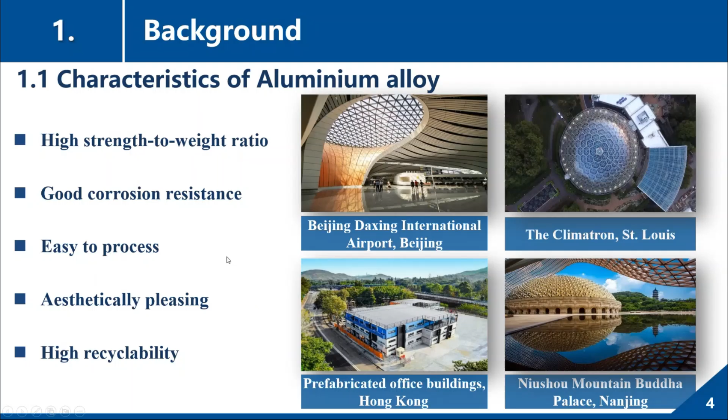But although there are several merits, some characteristics of aluminum alloy we should pay attention to in real engineering practice. For example, the elastic modulus of aluminum alloy is very low relative to steel, around 1/3 of steel. So the buckling performance of aluminum alloy members is not as good as steel members.

More than this, the elevated temperature performance of aluminum alloy structure is also not as good as steel structures. First, it will melt at around 600 centigrade. And it has a sharp reduction in elastic modulus and yield stress when the temperature is higher than 300 centigrade. The pictures on the right-hand side present this characteristic.

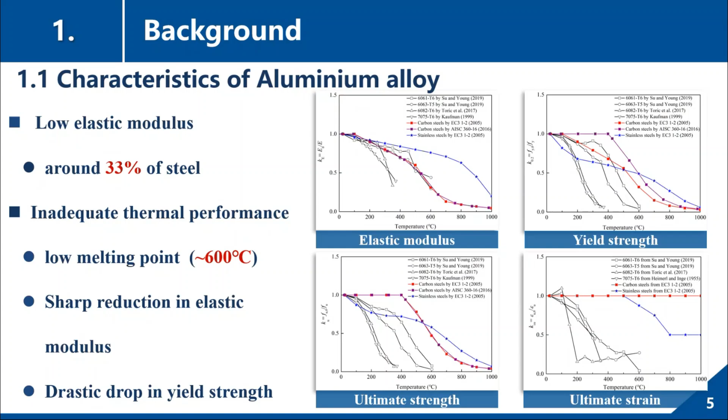So in order to accurately design the high temperature behavior of aluminum alloy, current codes such as Eurocode, American code, and Chinese code give a lot of design formulas, but there are some limitations. First, although aluminum alloy degrades at high temperature, the codified methods neglect it. The second point is that current codified methods neglect the shape variation of the constitutive curves of aluminum alloy. There is a stronger strain hardening behavior at higher temperatures, and this influences the high temperature behavior, so codified methods should consider this.

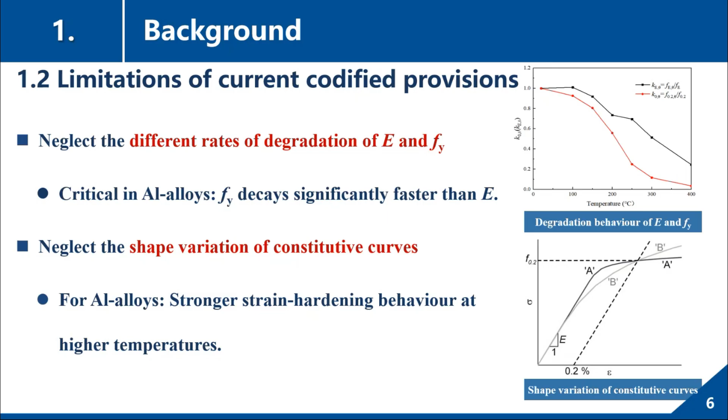So this is the background. To overcome the current limitations, we carried out a series of studies during the past 5 to 6 years. The first is at the material level.

We carried out tests for two kinds of material. The first one is the high strength aluminum alloy, it is 7,000 series. The second one is normal strength, it is 6,000 series.

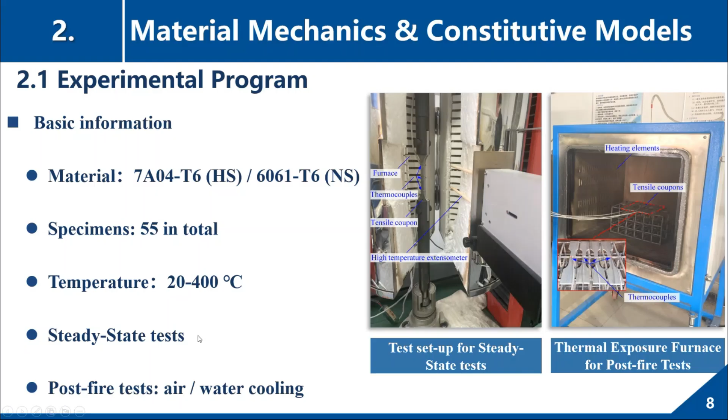In total, specimens were tested in the range from ambient temperature to 400 centigrade, and these tests were carried out in two conditions. The first is steady state. The second is post-fire state. For the post-fire cases, there are two kinds of cooling method, air and water. So we got the stress strain curves of all the specimens.

For the steady state tests under high temperatures, the stress degrades clearly when the temperature increases. But for the post-fire tests, the data scatter much more notably than the steady state tests.

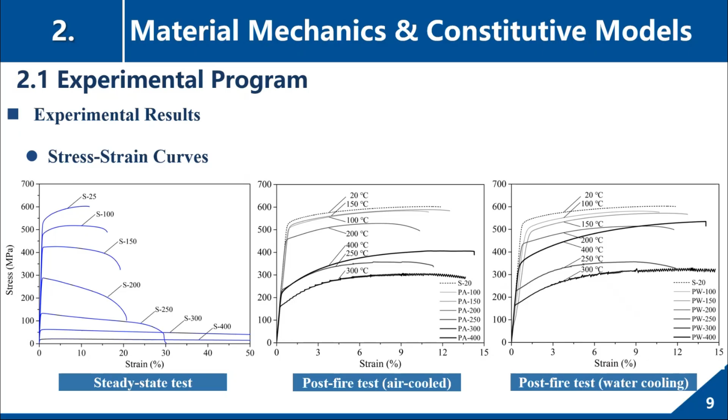And these are the failure modes. We can see that for the steady state test, when the temperature rises, the ductility, the deformation capacity, became better. But for the post-fire tests, the deformation capacity remains almost the same.

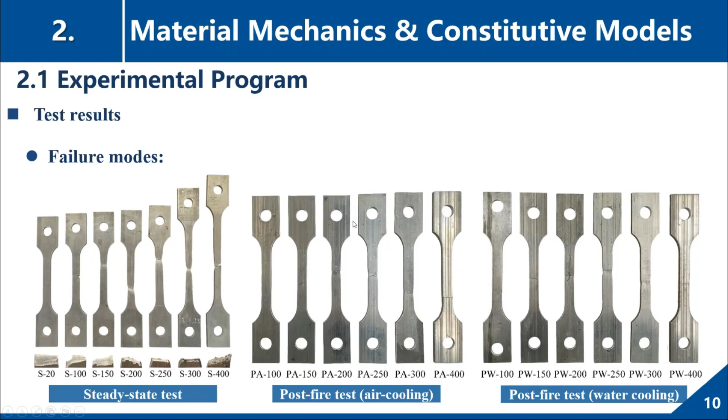Based on the material test results, as well as results collected from literature, we proposed a two-stage constitutive model. This model is for high temperature test and high temperature material property, and it is based on the ambient temperature constitutive model of the two-stage one, proposed by Xiang and me, and published in Journal of Structural Engineering in 2021.

And it is really a highly cited paper. Till now, I think the citation of it is around 150.

And for this model, we can see there is a very important point. It's called the middle point between the yield point and the peak point.

Why do we use this point to capture the second stage? Because for aluminum alloy, sometimes it will fracture before the strain equals 1%. But other constitutive models of the two stage, for example, some stainless steel constitutive models, adopt epsilon 1 for the second stage. But for aluminum alloy, we cannot use this point because it may fail before that point.

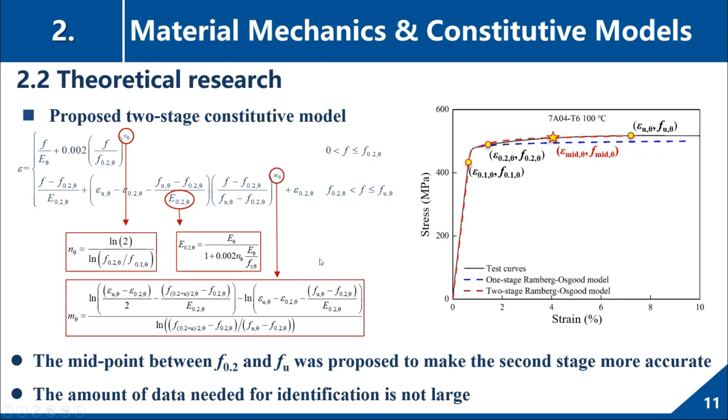So we propose the middle point between the yield and the peak point. And finally, we calibrate the model from the test results and found that the model is rather accurate. And we validate the model through the experimentally obtained data.

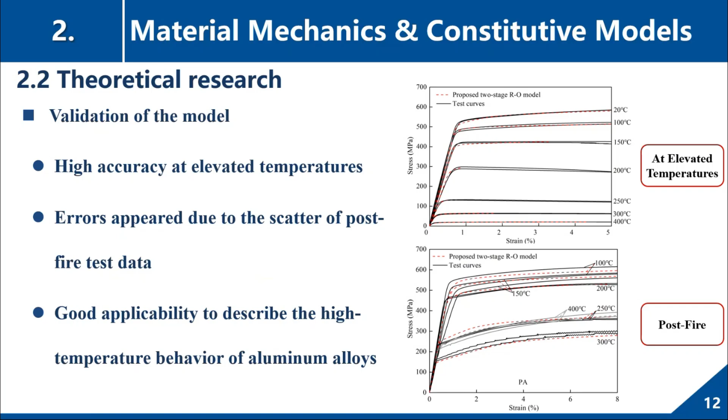So based on the material level investigations, we start to investigate at the plate level, because all the cross sections are composed of plate elements. So the plate level research should be the first step.

So we carried out numerical research based on over 1,000 models. This is the model assumption.

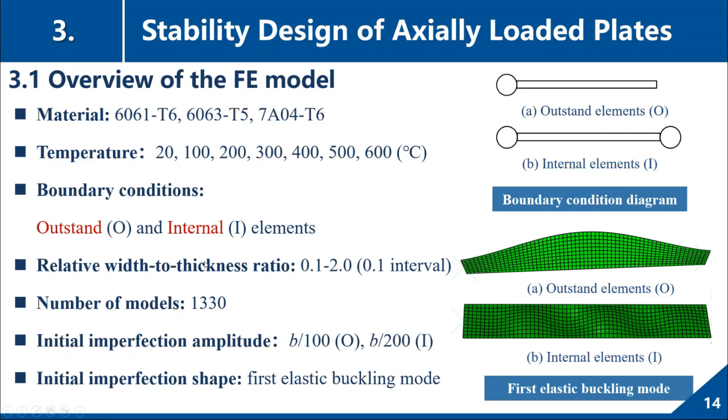First, we should validate the plate FE model. We used published results from a Netherlands researcher, and found that our FE model is very accurate.

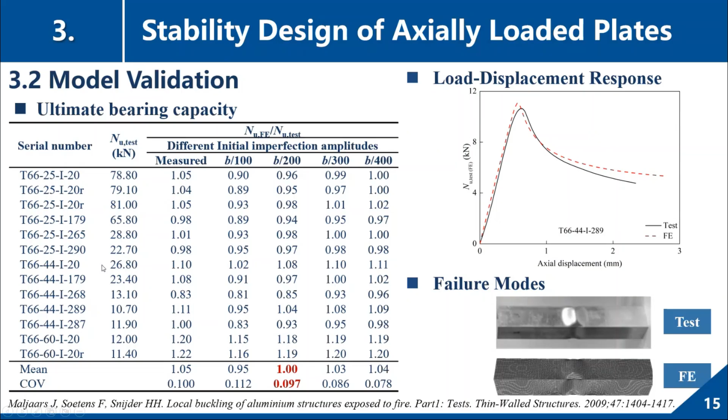And then we can use this FE model to carry out parametric analysis. The first step, we use more than 1,000 data points to evaluate the accuracy of existing models.

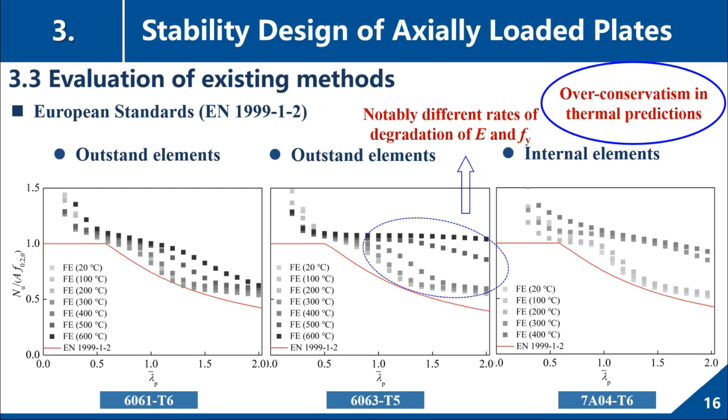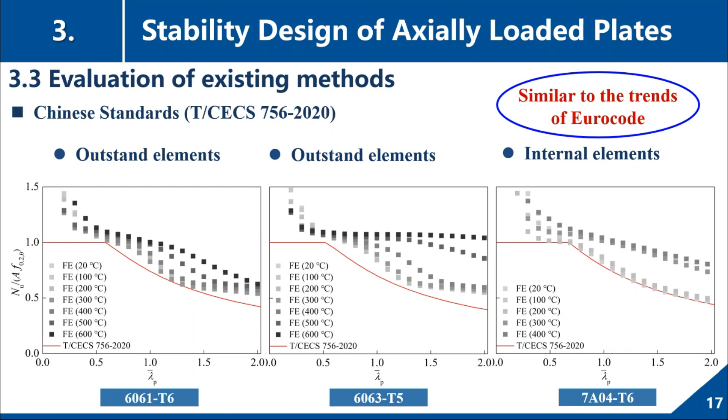The first one, the European standard. We found that because of the different degradation rates of elastic modulus and yield stress, the accuracy of the Eurocode method is not good. It's over conservative. And then we evaluate the Chinese standard, because the Chinese standard is very similar to the European one, so the outcome is also similar.

And then we assessed the American standard. We found that although the accuracy is better, it's excessively scattered.

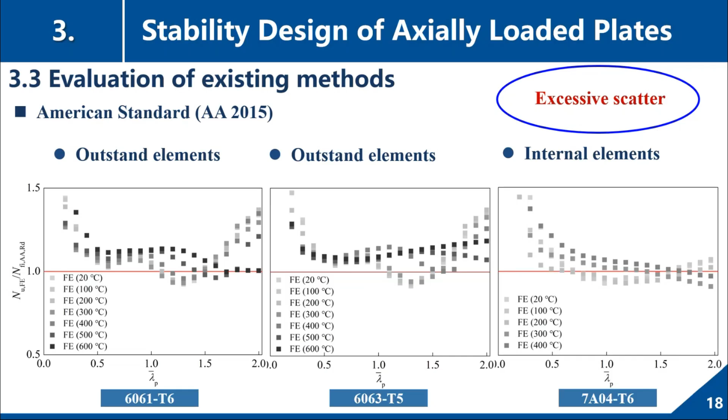After the assessment of the codified methods, we also evaluated methods proposed by other scholars. The first one is Maljaars, the co-author who carried out the tests that we used to validate our FE model. We can see that his method is much more accurate, but some data is overestimated at high temperatures.

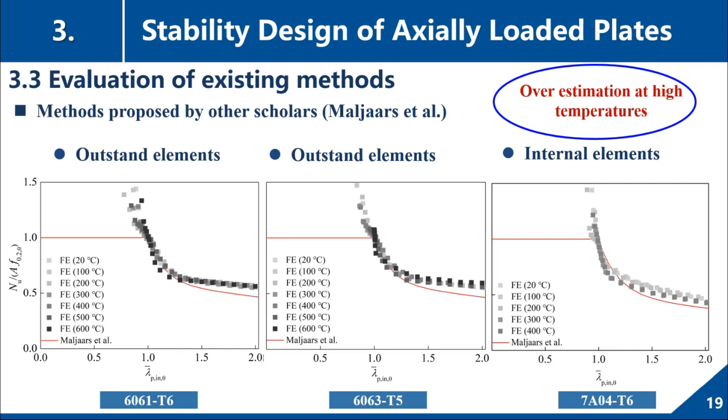To explain, we can see the data here with the dark color, meaning very high temperature. For this data, the design method is dangerous. So we found that the existing methods are not accurate and very scattered, so it's essential to propose a new model for the plate buckling resistance.

So we proposed new equations based on the European code system. For our formula, we incorporate two new parameters, lambda p theta and gamma theta. The first one accounts for different degradation rates of E and Fy, and the second one captures the stress-strain curve variation of aluminum alloys.

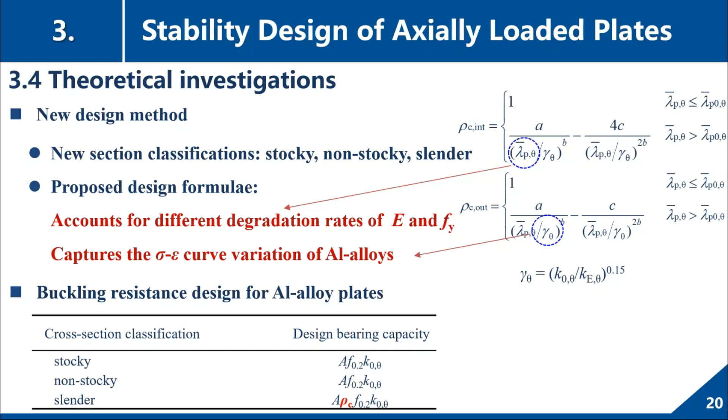Finally, we use the test data as well as the FE data to validate the proposed method. We can find that the accuracy and the consistency are both good.

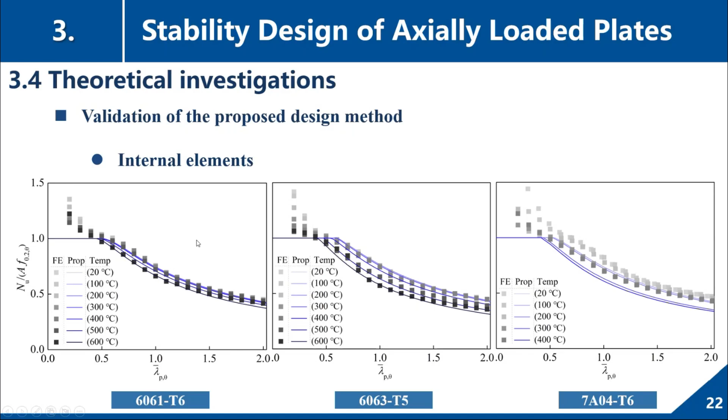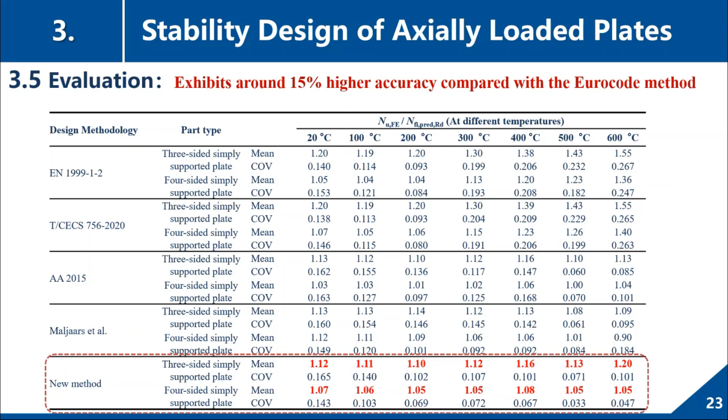And the cross-section is composed of plates, but there is a new problem, that is the element interaction. So in the fourth aspect of my report, I will introduce how we dealt with the plate element interaction.

Before the theoretical work, we also carried out a series of cross-section tests. The tests include three kinds of cross-section types: RHS, SHS, and H section. All of them are in class 4, that is slender cross-section. The material we employed was high-strength aluminum alloy, and the temperature range was from 20 to 400 centigrade. They are all steady-state tests.

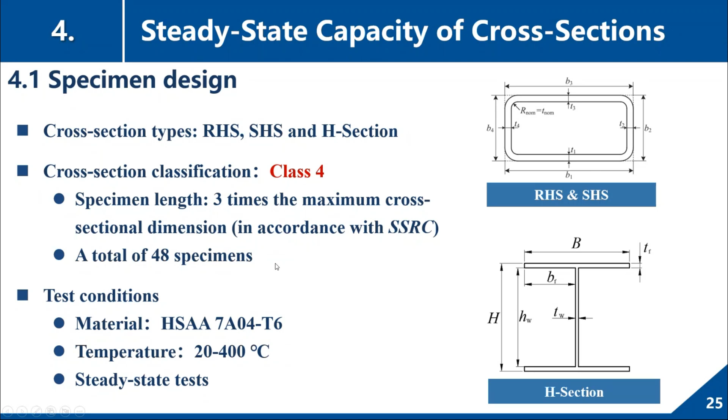Actually, we designed an electric heating high precision furnace by ourselves, and this furnace is very useful and convenient for us. The test was conducted in Tianjin University.

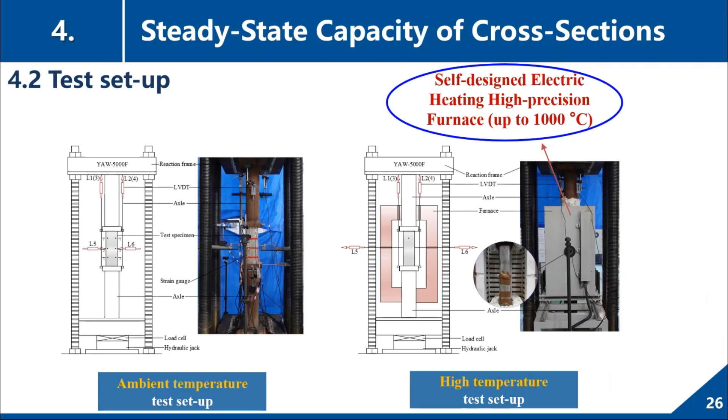Before the test, we scanned the imperfection of all of the specimens by scanner, and then we processed the data through the software of Geomagic Wrap.

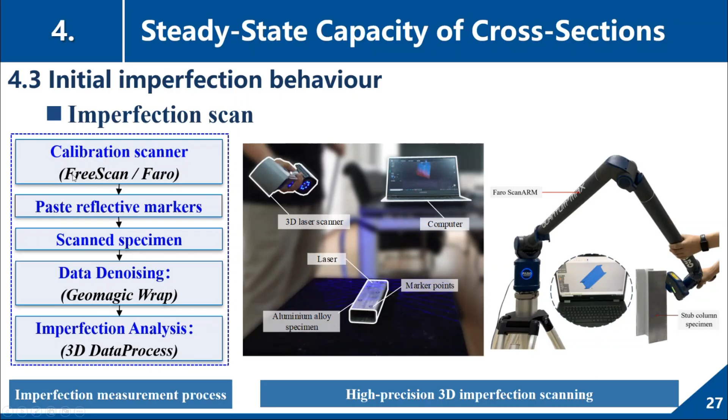We found that the high-strength aluminum alloy cross-sections exhibit smaller initial geometric imperfections compared to the normal strength cross-sections due to its strength advantage. During the transportation and fabrication, the high strength makes it less possible to deform, so it has lower imperfection.

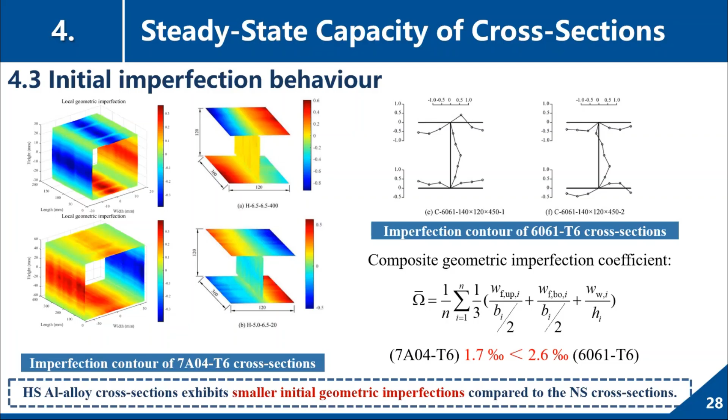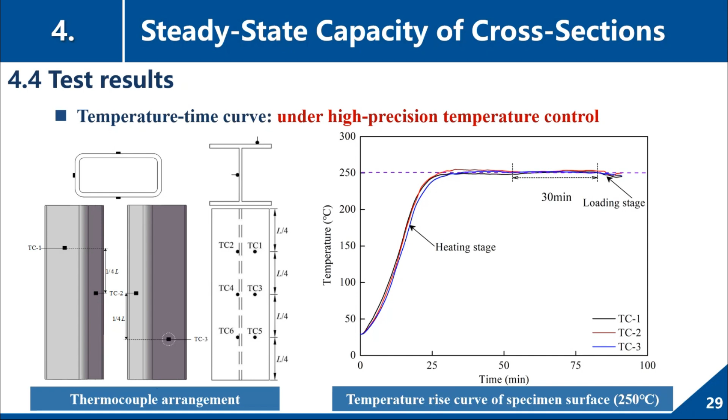And this is our temperature time curve. It presents that the test is under high precision temperature control. I think for students or professors who carried out high temperature tests, they will know it's rather difficult to get such a temperature curve.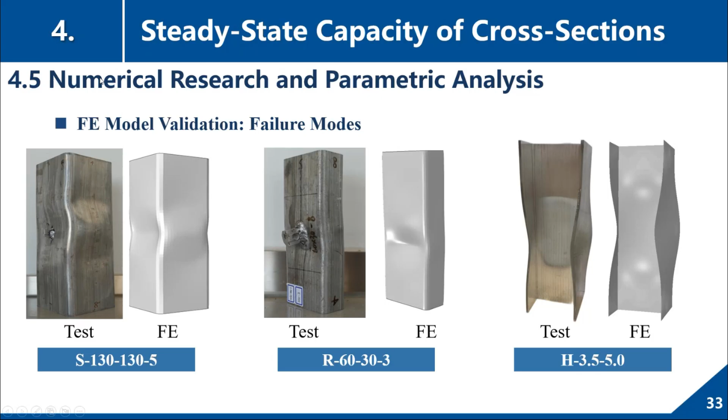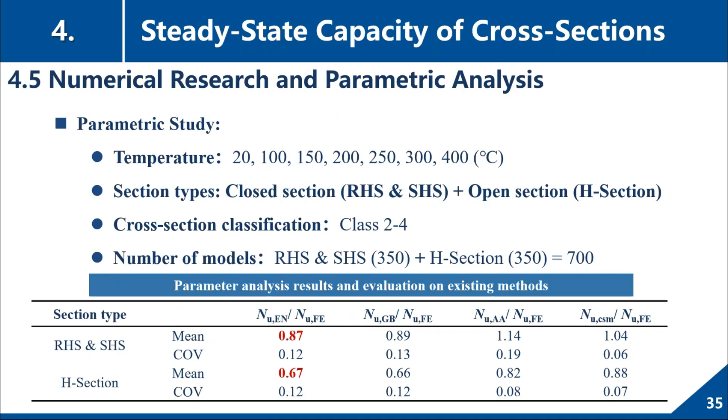So till now, all of the test data and FE data we have got. Now we will use all of the data to develop a new method to account for the interplate interaction. This is very new and very important for cross-section design, because in the design of all metal structural cross-sections, all of the codified methods till now in history did not consider the plate interaction because it's rather difficult.

Some scholars have accounted for this. I'll introduce two methods. One is proposed by Professor Gardner, an equation to account for this, but this equation is not very accurate, it has some errors. The second one is proposed by Ben Schafer, and this method is a numerical method called CUFSM. Although it is very accurate, for designers in a company, I think they cannot use this to design a cross-section.

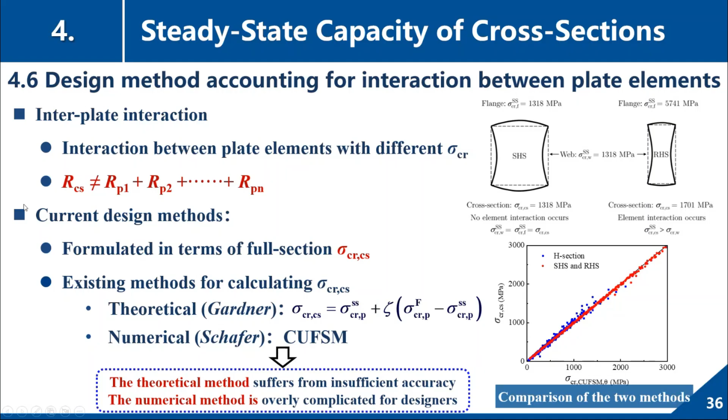So to overcome this problem, we developed a new method using machine learning. I think machine learning is also a numerical method, but it's very easy to use for designers, and it is also very accurate, much more accurate than any design formula.

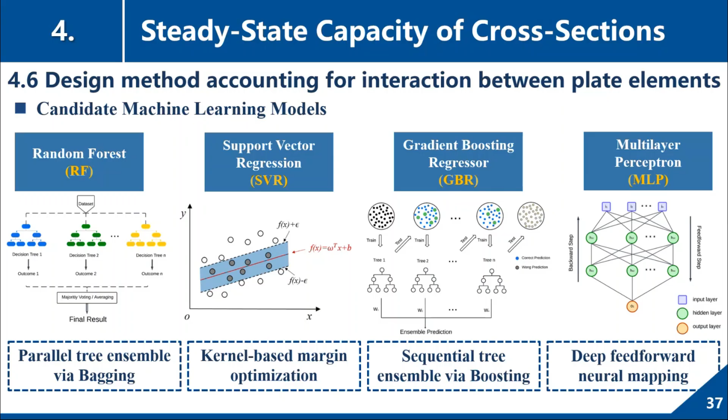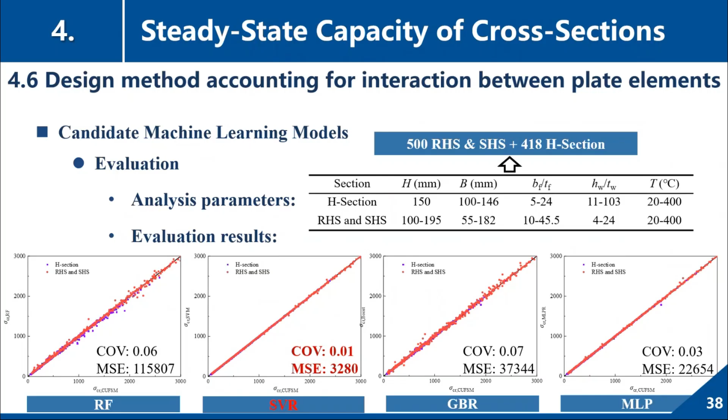To develop an accurate machine learning model, we selected a series of candidate models, and among them we found that the support vector regression, SVR model, is the best one. So in the following prediction we use this model. We adopt this model, and finally,

we propose a cross-section level method based on two parts. The first part is our proposed plate method I just introduced in the third chapter. The second part is our machine learning based predictor for the plate interaction, that is based on sigma CR theta CS, where CS means the cross-section. So we compose these two parts into our new method for cross-sections.

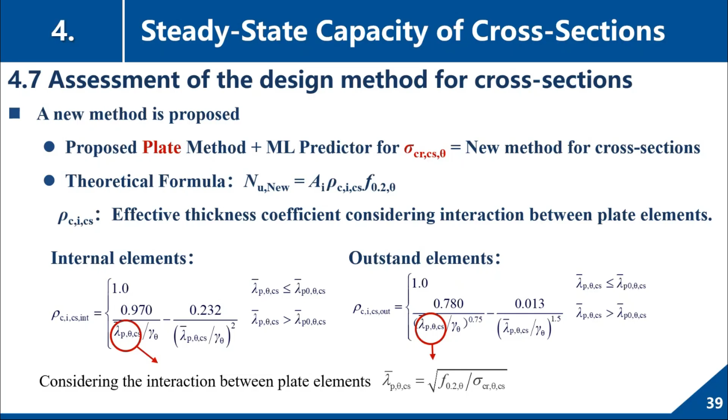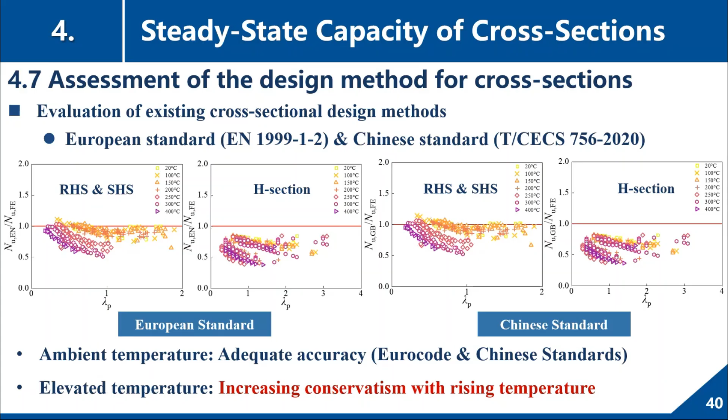So this is our new method. So what's the outcome? What's the advantage of our new method? We can see that we evaluate all of the cross-section level methods again: cross-section level of the European standard and Chinese standard. Now we can see the error is very large. We can also see the method from the American standard and also the continuous strength method proposed by Professor Gardner. For CSM, although it is accurate, the scatter is also large.

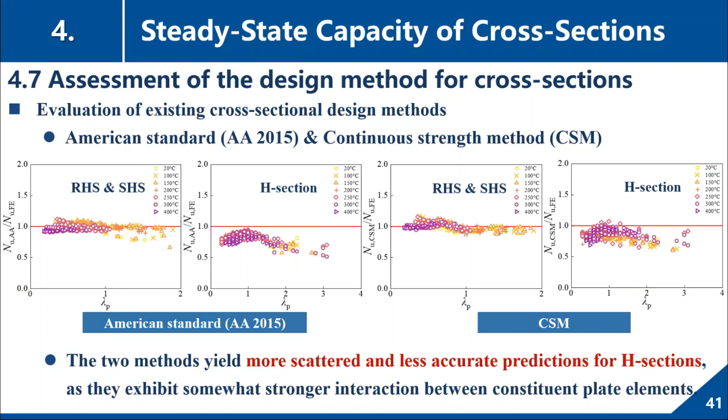Finally, these are the outcome or results of our proposed method. We can see that our method has superior accuracy, around 15% higher than Eurocode, and minimal data scatter. So this is our way to design the aluminum alloy cross-sections under elevated temperature.

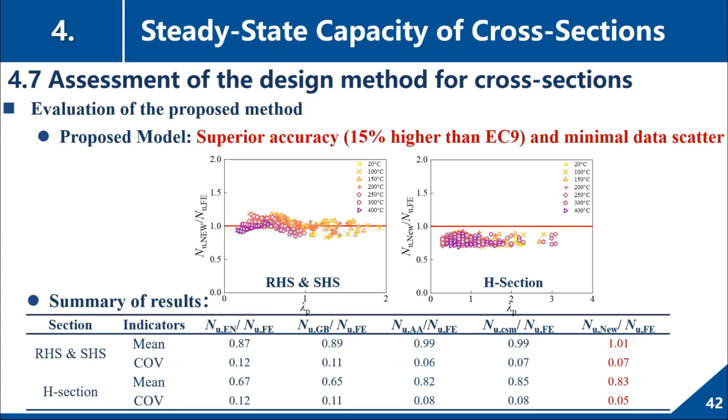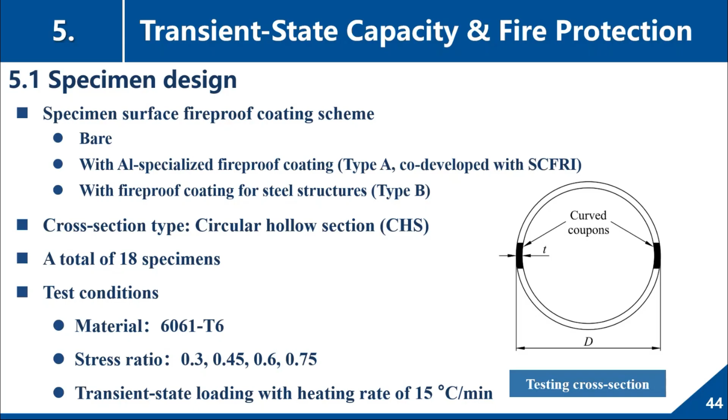Now I want to introduce something interesting. Actually, I am in the area of structural engineering, but we developed a specially designed coating for aluminum alloy with an institution in Sichuan province, China.

This kind of coating is very special because its chemical composition gives it a lower intumescence onset temperature. We commonly use steel structure coatings for aluminum structures, but this kind of intumescence starts to work at a very high temperature. But at that temperature, aluminum alloy starts to fail and lose its strength. So we needed a new intumescent coating with a lower onset temperature.

This is the first difference. The second is that the ordinary coating for steel structure is corrosive, but the new one is non-corrosive. So we call the new one type A and the ordinary one type B. We used these two kinds of coatings on our cross sections, stub column members, and then put them into the furnace to see the difference between the two coatings.

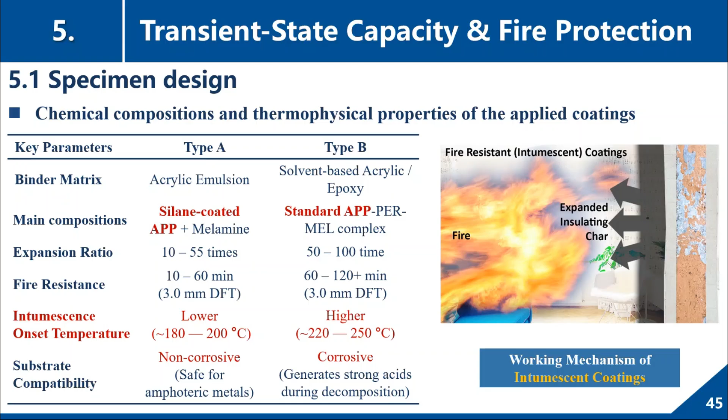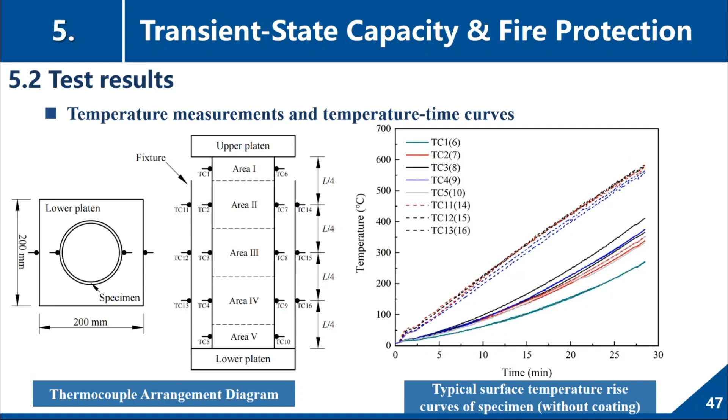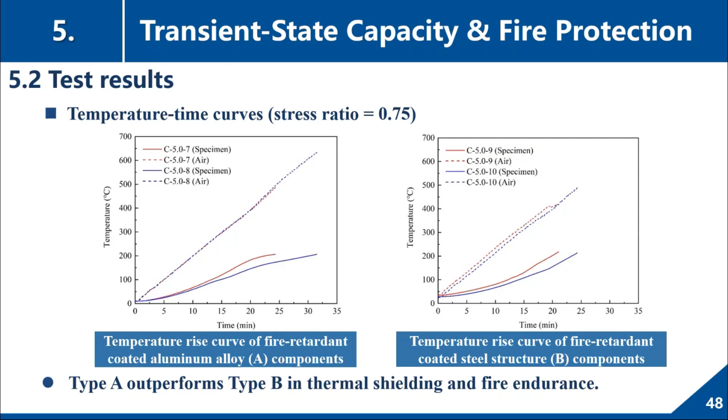These are the test setup, temperature measurements, and temperature-time curves. First, we found from the temperature-time curves of the two coating-protected members that type A outperforms type B in thermal shielding and fire endurance. This is even more evident from the failure modes.

First, let's see the ambient temperature test. It occurs elephant foot local buckling at the column ends, which is very common. But for the elevated temperature test, it's rather different, because in our furnace the temperature in the middle is higher than at both ends, so the buckling point shifts to the middle.

The most interesting thing is the coating's behavior on the protected structure. This one is protected by our newly developed coating, and we found that the coating maintained its integrity. But for the members protected by the ordinary steel structure coating, it was spalling from the specimen because of its poor adhesion.

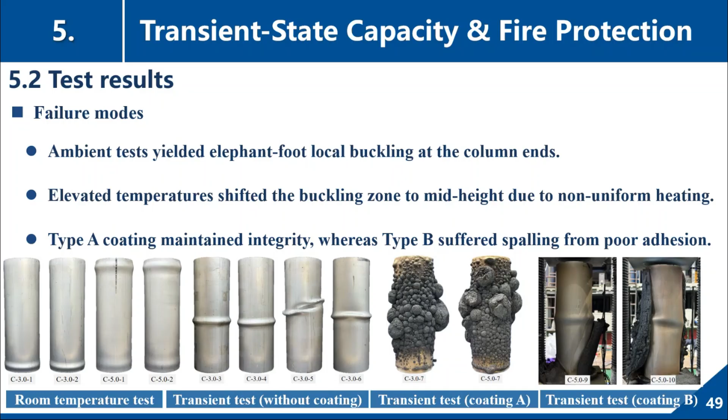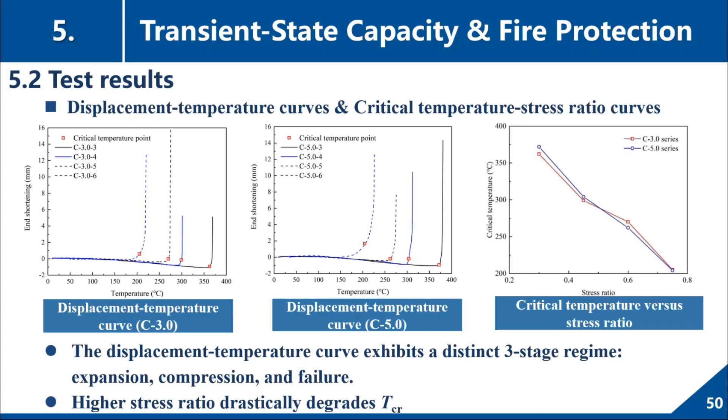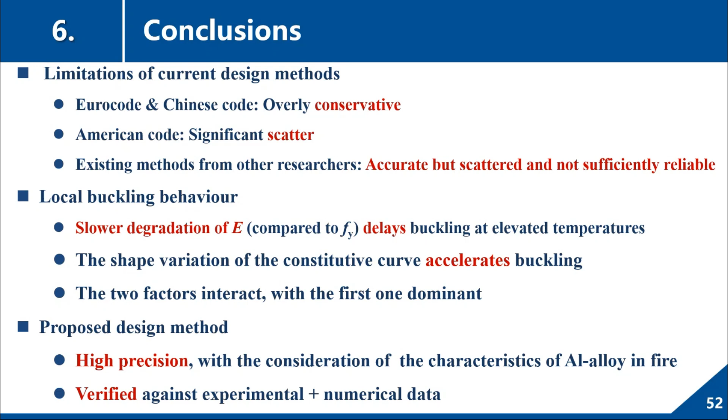We have published around 8 papers, and among them, one is under review now.